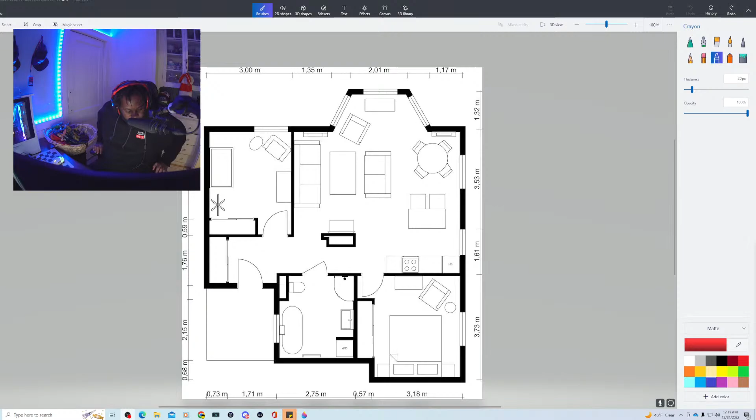So if you haven't seen it, this is part 2 of Flippers. We've been trying our best to find something and close it by the end of the year, but it doesn't look like that's going to happen. So it looks like we're going to have to go into the new year looking to find something. But that's all good because I figured out I don't have anything in place.

And for those who are just joining, let's give a little back history. Welcome to Sell the Listing. What I want to do in 2023 is accomplish my very first flip.

I've seen a lot of guys do it, but seeing somebody do it and actually doing it is a completely different ball game. It's like, why didn't he throw the ball over there? Because you're watching the game on the couch on a wide screen, seeing everything slowly develop. While you're in the game, it's moving super fast. And by the way, you're on a delay, so by the time you saw the play open up, that play's already gone. So it's very, very hard to judge something from the outside.

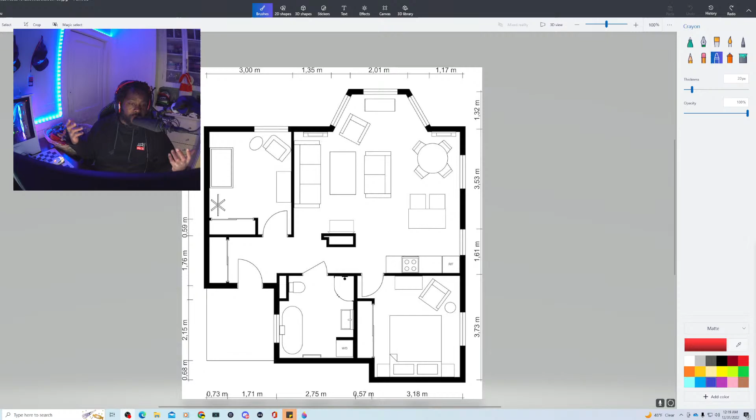So I want to do a flip. I went to my boy, VL Custom. He works down at 1010 Mass Ave, which is basically the place that handles all the permits. And I said, yo V, I want to get into flipping. The first thing he said to me was, do you have a floor plan?

Well, I do have the Matterport camera, so I can go in and scan the room and get a floor plan. But what he said was, that's called an as-is drawing, that's what the place looked like as is. So it's great for real estate, it's great for buyers, it's great for a lot of things.

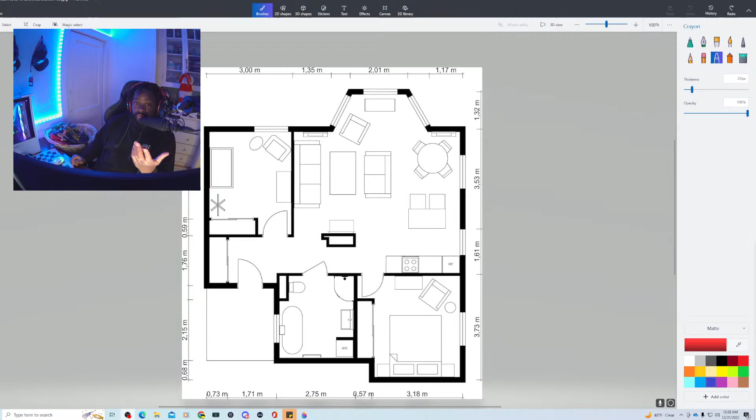But what is not great for is figuring out what work you're going to do. How are you going to alter the plan? Right, so we have a plan here, and these things here, I'm going to go in green. If you're watching us on YouTube, this will make sense. But if you're listening on the podcast, you're going to have to watch it on YouTube.

All right, so what we got here is, these things in green are your windows, right? It doesn't tell me what floor we're on, but the things in green are your windows, right?

And I know this because I took technical drawing in high school real quickly, from Mr. Walsh at Don Bosco Tech. I fucking hated technical drawing, I failed it. Basically it was like drafting, and I just fucking hid for 4 years.

So I'm about to graduate, and they come to the office and go, hey listen dude, you failed technical drawing freshman year, you're going to have to take that class over. So I had to go to summer school to graduate, and it was different. It was me, Mr. Walsh, in a room, just talking.

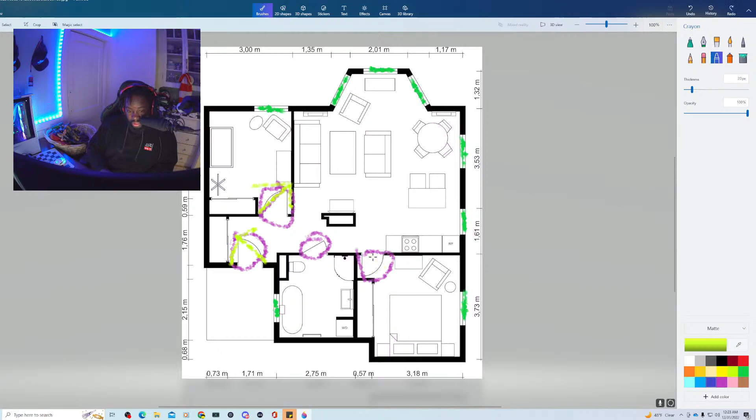So let's clean up our drawing here. Let's say this is what we're looking at. This is my bathroom here. This looks like a living room. This could be a bedroom here. That's a bedroom here. This is my kitchen, with an open concept kitchen. This is my living room here, probably with my TV, table, and all this stuff. So this is the plan, right?

But let's say this was built in 1935. So it's old as hell. And everybody now wants this open concept, right?

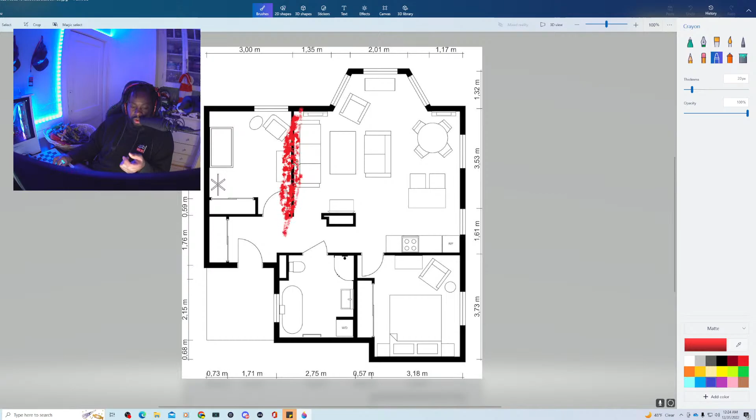So we have these walls here, right? We're thinking, I want to get rid of this wall here, and I want to get rid of this wall here, and have an open concept. So this right here could be my dining room, a big dining room, with a big table in the middle. I'm going to put a T in the middle for table. And then over here, I want my living room to be. So even when I'm cooking, I can still have conversations with people because we can see and still talk, since that wall is gone.

So when you go down to 1010 Mass Avenue, you're like, hey man, I'm going to knock this wall out here, and this wall out here, and this wall out here, and this wall out here. I just want a big open concept. But they're going to be like, where's your plans?

Are these walls weight bearing? Are these the walls that's holding up the house? So this is why I believe the first step for flipping is getting your architect. You got to get your architect in.

So when you close, right, let's say 55 Main Street. You think about buying 55 Main Street, all right? I have a Matterport camera, so I could go in and scan it real quickly, boom boom boom boom. And let's say I put in an offer, right.

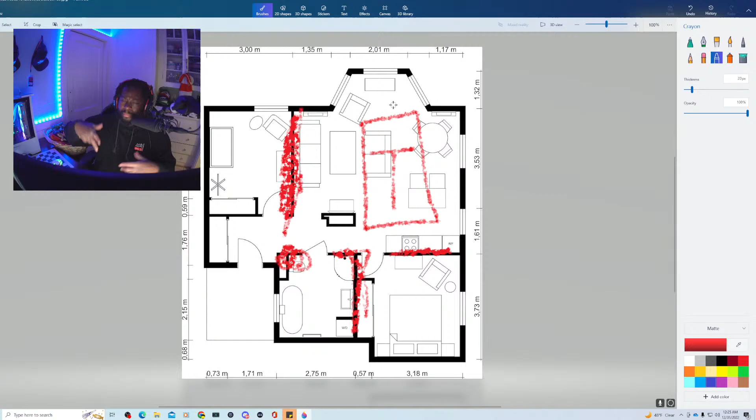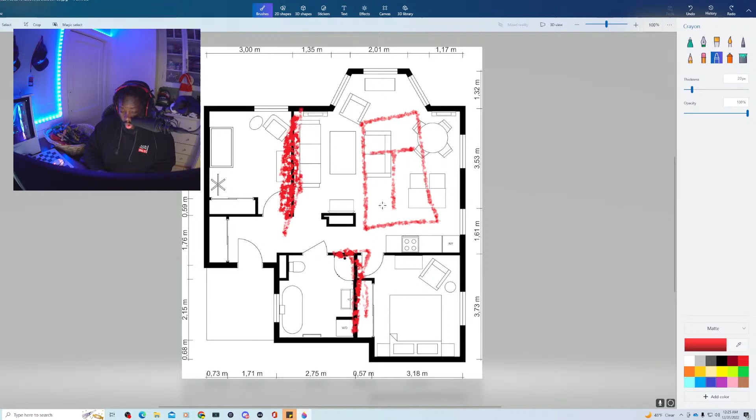And while everything is closing for 30 days, I could secretly send these plans to an architect and have the architect start to draw my plans and remove walls, or add walls. Maybe I want to add this here. Maybe I want to put like a little swimming pool in here, you know what I'm saying?

Or maybe I want to flip the floor plan. Maybe I don't want my kitchen where it is right here in this drawing. Maybe I want to put my kitchen over here, because they always say you want to put your kitchen by windows, you want windows in your kitchen. And over here I'm seeing the stove on this wall here, let me circle this in yellow. Over here on this wall, I don't see any windows here, but I see windows up here, right?

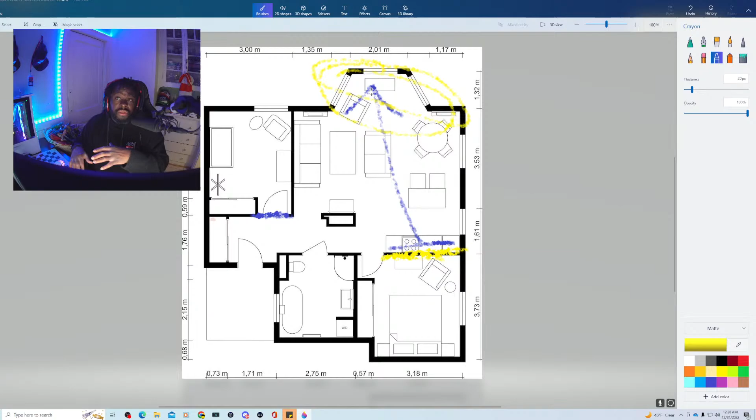So maybe I want to put my sink facing out to the backyard. I don't know what floor this is or where this floor plan is, but maybe I want to move my kitchen to here, so then I could wash dishes and peek at the neighbors, see what the hell they're doing. But when I was over here, think about the floor plan, there's no window there, it's like I'm washing dishes and staring into the wall.

So think about floor plan again. So for all these alterations that you want to do to your floor plan, you want to make sure that you put a verbal offer in, or put your offer in, and the owner says, yeah, I'll take it. You ask the owner, hey, can I go in and do a quick scan so when it's time for me to move in, I could get the renovation started? Some may say yes, some may say no.

Some may just give you a verbal, because remember, in Massachusetts, the owner could back out, but the buyer can't. It's kind of weird, I don't know. Maybe if I took the real estate exam and passed it, I would be able to answer my own question.

So let's say he or she says yes. Then boom, you go in, you do a quick scan. Now you have your floor plan here. So the next thing you need to do is hire an architect. Once you get an architect, you could give him the scan, because remember, we scanned with the Matterport. We went in, we asked the seller, hey, can I go in and scan it?

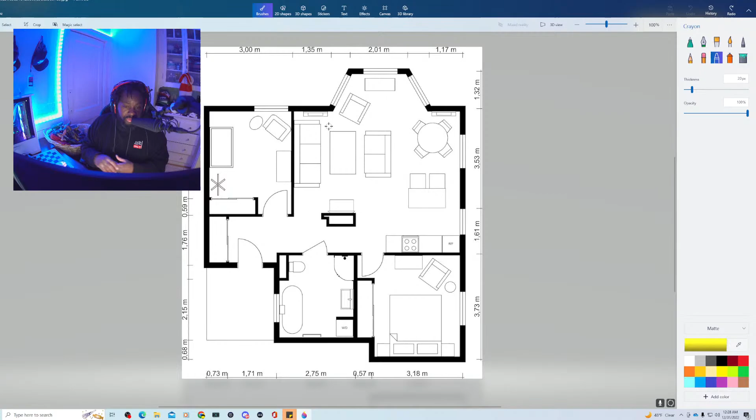So when we finally get the papers, here's my intent, here's my commitment, here's my deposit. I'm really interested in this property, I hope that you sell it to me, I would love to buy this and move in or renovate it. So when you explain that to the seller, Maybe they'll say, yeah, go and flip it out, man, I know you want to get in there and start right away so there's no dead space.

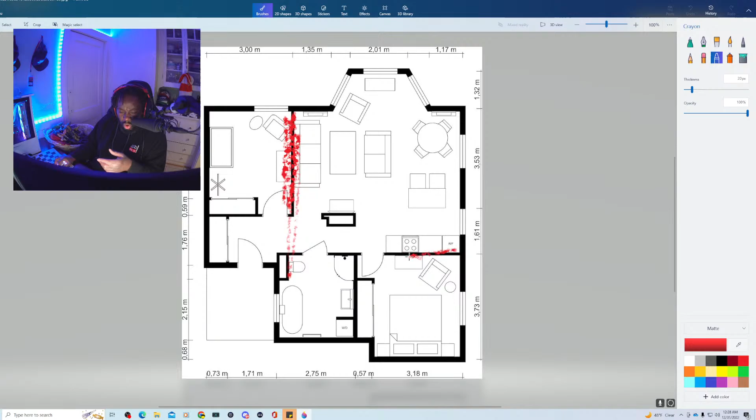So this is our floor plan here. We're going to go to our architect, we'll mark this in red and say, you know what, I want this wall gone, I want this wall gone, I want this wall gone, and I want this wall gone.

Because we're not architects or engineers, we're investors. But soon we'll start to learn these things, and we start to look at floor plans and visually be like, oh, that's weight bearing, that's not weight bearing, that's a wall that we can take out. You want to go to your architect and be like, yo, I wanted to remove these walls. No big deal, the architect will remove those walls. It's just a drawing.

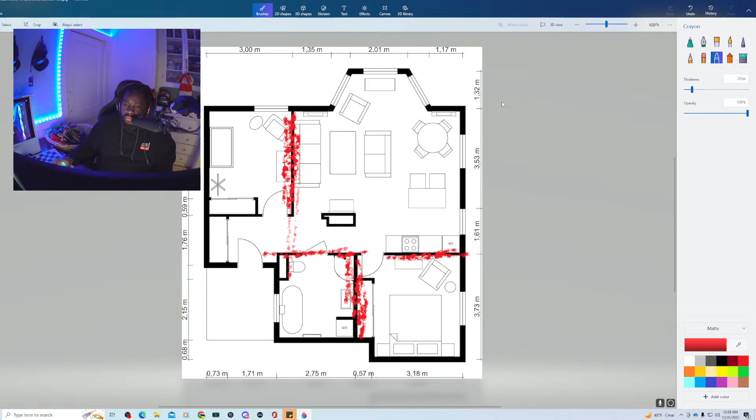But most architects will refer you to an engineer. And the engineer will look at your plans and go, my guy, you can't remove this wall, it's weight bearing. You can't move this wall, it's weight bearing. You can't tear off the side of this house and leave it open. You can't do that, the house will crumble and birds and all type of crap will fly into your house.

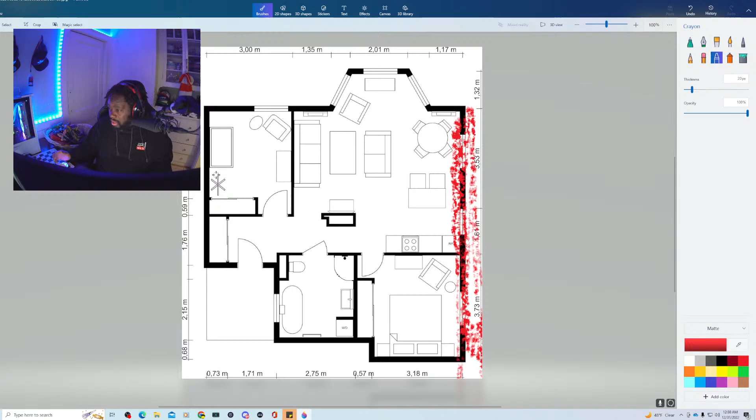You can't do that, think about floor plan here. That's fine if you want to put a window the size of this, but you got to find the right guys to install it. I want to move my plumbing over here, so now I want to move my plumbing over here, because remember, I don't like my kitchen sink over here, I'm going to move it to the windows.

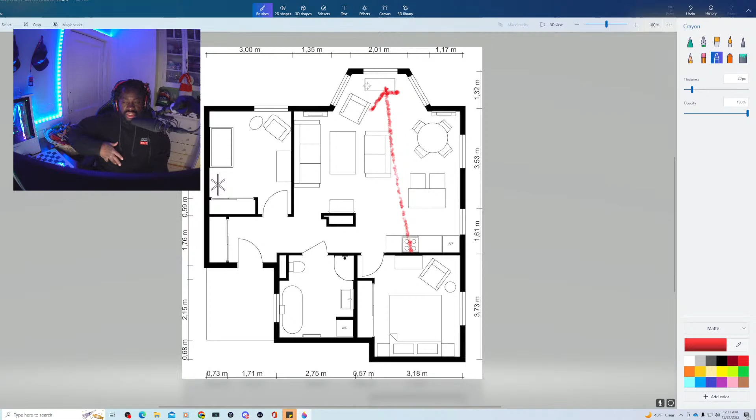So now you're going to need engineers, interior designers, plumbers, electricians. Then you can start building a BIM, and then you start doing a little 3D thing. So all this is going on in the background. You get your Matterport back, you got your architect with your new plans, you send off to the engineer. The engineer will say, yeah, absolutely, clean up our floor plan here.

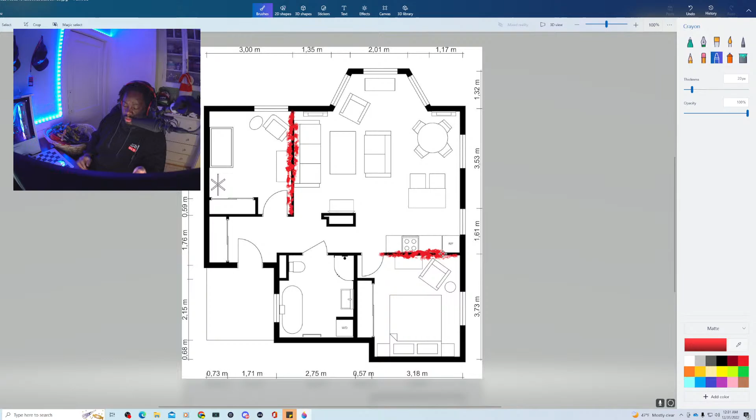Absolutely, you could remove this wall, you just got to put LVL here, that's it, and you got to put LVL here. LVL is just a big piece of wood that's stronger than a 2x4 that holds — you can put your weight on it. So you want to make sure that all of that's in place.

So the minute you get the keys, you're standing outside the unit or the listing you're buying, you've got your dumpster on wheels, and you're just waiting for the phone call from your partner: yo, I got the keys. And you throw the dumpster into the driveway, and you kick open the door because that door's not sealed, and you start the demo. That's what you want to do.

The only way you can get to that space is once you become the owner of the property, you got to go into 1010 Mass Ave and submit your plans. So now all your plans are ready to go. I heard that you could get a short term permit where you could do your demo, and then all the structural change that you want to do — that takes 30 days. So think about this.

Think about this, you close on Monday, you go to the unit and you're like, I'm going to start the demo. Fine, you start the demo, you're tearing down walls. The inspector rolls by, comes in, hey, you guys got a permit? No. You get a stop work order. That's it, can't work on your house.

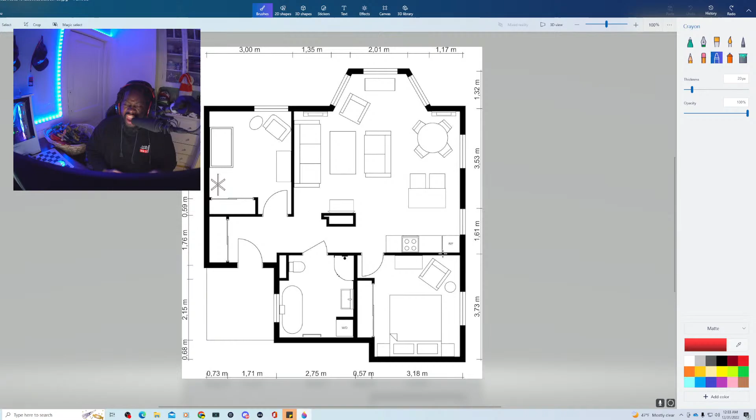If you're flipping, every single second counts. You get a stop work order, that could take weeks, days, hours, minutes — I don't know what you have to do to get it cleared up. Massachusetts is very, very strict.

So now you wanted to get out of this project in 30, 60, 90, 120 days. But now you can't because you're jammed up with the permitting people.

Or let's say you're not that type of rebel, you're an honest person. They give you the keys, you go down to 1010 Mass Ave, and you say, listen, I want to gut it, remove a couple of walls, and I need a permit for that. And they're going to say, well, where's your plans? My what? Your plans, do you have a floor plan?

And a lot of people draw their floor plans on a napkin, right? Some guys will accept it, some guys won't.

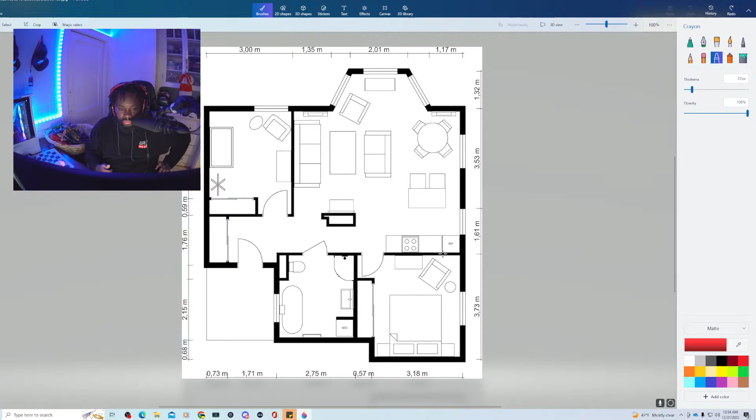So then now they don't give you the permit. Now you got to get on the phone, call architects. They got to come out, measure the room, build a floor plan.

In this market where everybody's a flipper, everybody's an investor, everybody's in real estate, shit is moving fast. Everybody's at work - contractors, architects, engineers, civil engineers, painters, photographers, brokers, real estate agents. Everybody's cranked out. Nobody's at home sitting on their hands waiting for the phone to ring.

When is somebody gonna call me? My phone hasn't rang. That's not happening, folks.

So now you rush out from 1010 Mass Ave, you go home, you go on Google. Now you got to find an architect. The architect's got to come out - he either sends a Matterport guy or he comes out and draws the space for you. I don't know how long that takes, I don't know how long it takes to draw a plan like that, but I know it's not going to take you 2 hours.

So now he's got to draw the plans, print it out or send it to you. You go to Staples, you print it. This is 2 to 3 weeks into your project.

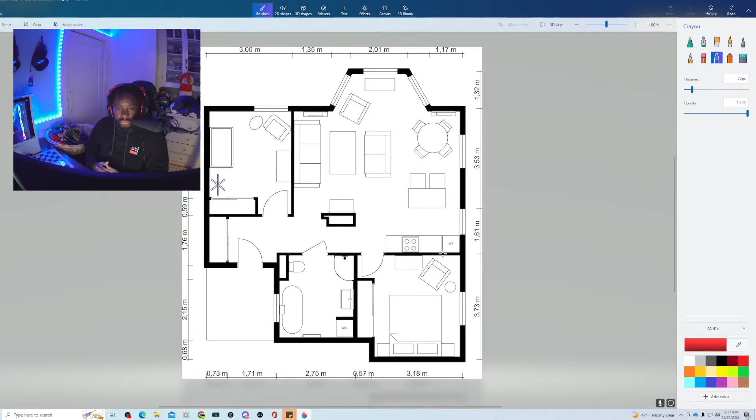Me personally, I think the architect and the engineer should be your first step. You solidify those first, put them on retainer, whatever you got to do. Hey listen man, you're an architect, I want to get into the business, please do me a favor, if I find something can you squeeze me in so I can get it moving, because I'm a beginner. You start to build relationships with people. I guarantee you the architect knows an engineer, that engineer knows a contractor, that contractor knows a plumber, because everybody's working in the same field together.

So now you got your as-is drawings from the Matterport camera that you can send to the architect. The architect can draw your plans how you want it - remove walls, add walls, move bathrooms, swap the floor plan. You know what I'm saying? Like maybe you want your living room down here, maybe you want your kitchen over here.

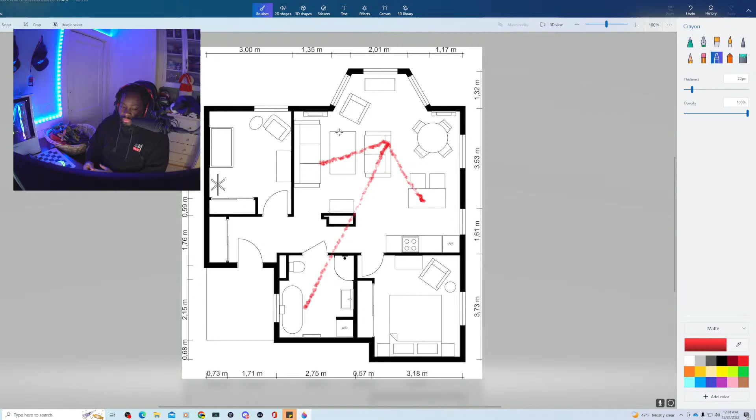Let's clear it up, I know if you're listening to the podcast you know what we're saying. Maybe this is your bathroom, and you know what, I want to put my shower in the middle of my living room. I want everybody to see my hot wife shower while we're watching football. Whatever you want to do.

Damn, son, where'd you find this? Right?

You want to make sure that all this is in line, so when you get those keys, you can run down and lay out your plan. And trust me, if you go down to 1010 Mass Ave or a permit office and you've got all your stuff laid out nice and clean, legible, big floor plans, you look professional - I guarantee you, even if there's a mistake on your paperwork, they'll rush you through. Because they're dealing with fucking boneheads for 8 hours a day, people coming in with no permit and their job should have started 3 weeks ago.

So to me, yes, you need a floor plan. Yes, you need an architect. Yes, you need an engineer. And I truly believe that if you found a good deal with a lot of equity, I guarantee you'll be able to find a hard money guy or a private investor all day long, because if you default on the loan, they could probably grab that property for next to nothing. So if you find a property with a lot of equity, I guarantee a hard money person will be really quick to work with you because the risk factor is not there.

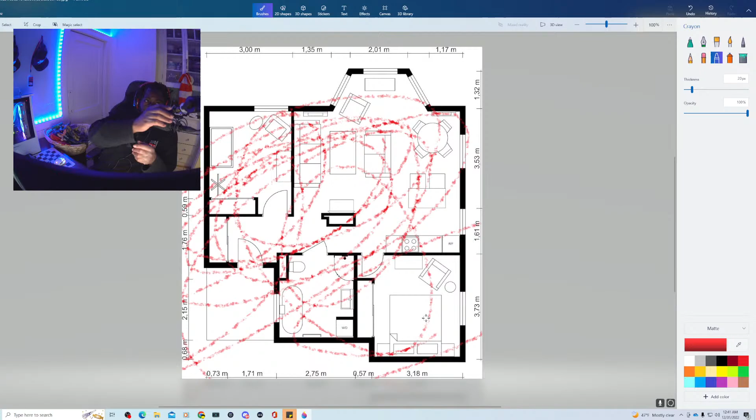This is your script here, right? As I'm coloring it in, this is your script here, people. It's like shooting a movie. Shooting a movie without a script can be really, really hard. If all the actors are on the same exact page and the whole crew's on the same page, then you don't need a script. But you got to understand, the people down at the permitting office have no clue what the hell you're talking about.

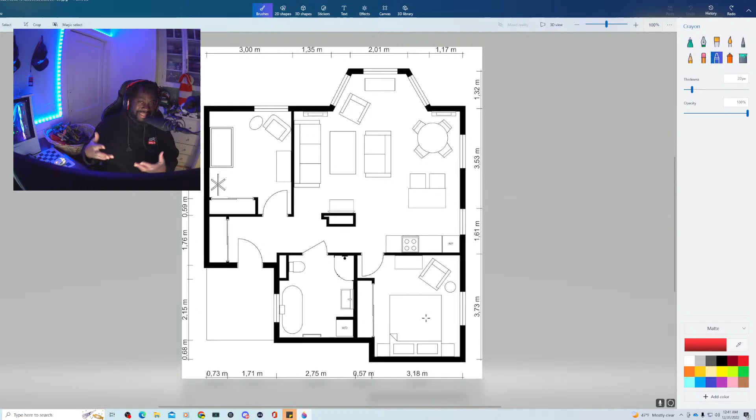There's millions of houses in Massachusetts. They don't know what your floor plan looks like, what your place looks like. They have no idea. So for them to visually see what you have going on, you got to come with your plans.

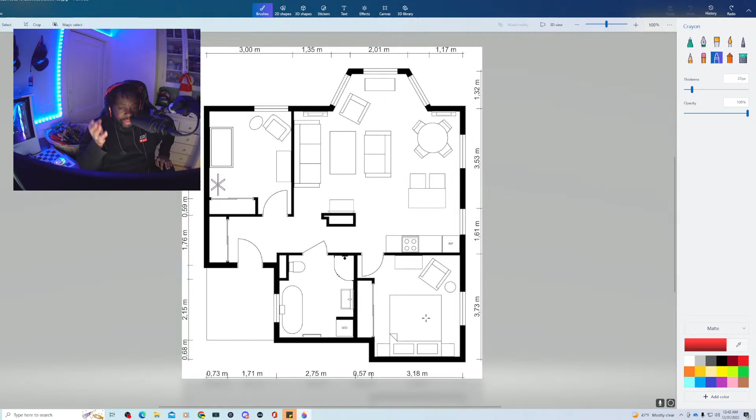And this is just what I'm learning. I'm not some expert, but this is what I'm learning. Get your plans in order first. Once you get your plans in order, then you start to see the scope of work that you need.

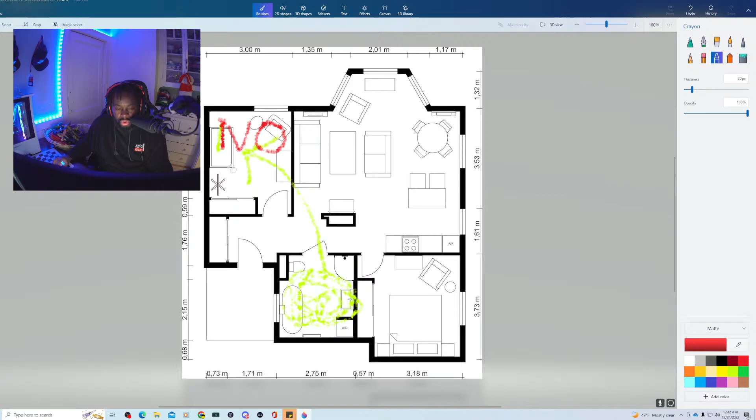We're just going to put this in green. I don't like my bathroom here, it's too small, I want to move my bathroom to this room. Right? This room doesn't have any plumbing. Pick a different color here — no P, there's no plumbing in this room. So now I got to move the plumbing from this room to that room.

Okay, that's what my drawing says, so that means now automatically I need a plumber. It just flows, right? When you have your plans and everything is visually laid out, then you know what you need to get to this point. I'm just learning this right now. I'm not an expert, but this is very important.

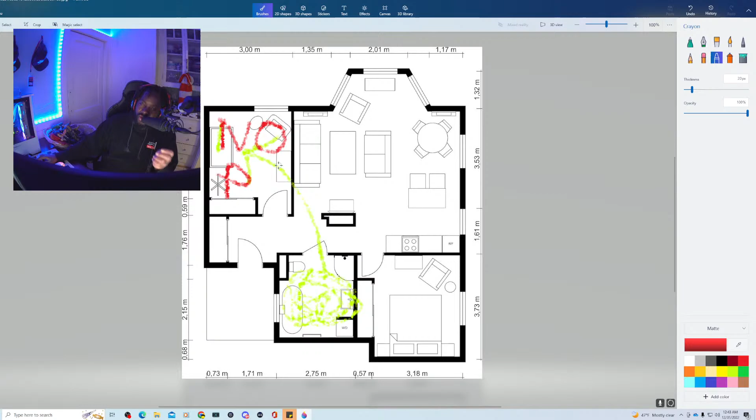As I learn more stuff, I'll do another podcast and another video blog. But the first things I need to do if I want to get into the flipping game: architect, engineer. Once I get the architect and engineer, and I find the property, I can find my hard money person — they're all over the place, not that hard. And then hopefully I could ask the architect or engineer, hey, who works with your plans? Oh, Jimmy, I do a lot of work with Jimmy. So there you go, there's your GC. Then your GC will have all your subs.

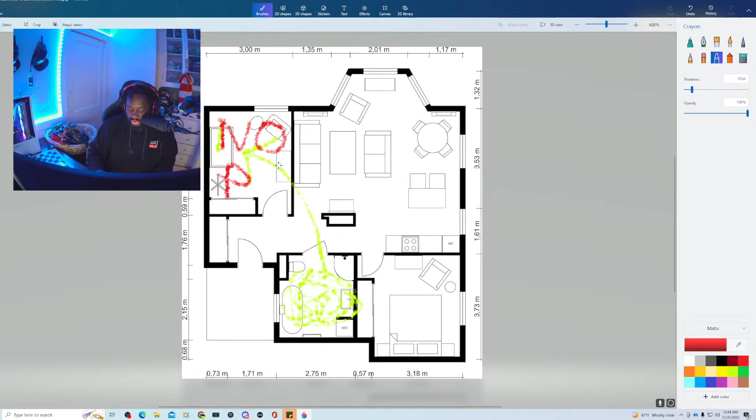But this right here, folks, we're going to draw a big smiley face in blue. This right here, folks, is where you want to start: your floor plan. All right.

It's 12:44 in the morning. Follow us on this journey. I don't know what the hell I'm doing, but this is just like my diary. I'm doing a digital media diary instead of writing it down in a book, like a lot of people do. This is like my video diary, my journal. Trying to flip a house.

I call my boy VO Customs and he says to me, you got to get your plans first. Now he's saying that because he works in that office, so he sees it as priority. Where other real estate agencies are like, man, I'll pull a permit, and by the time I get the permit back, blah blah blah. And we do — our team's so good that we do everything up to code anyway. But you're not on that level yet. I'm not on that level yet. I'm just beginning, but first things first, I want to get my plan.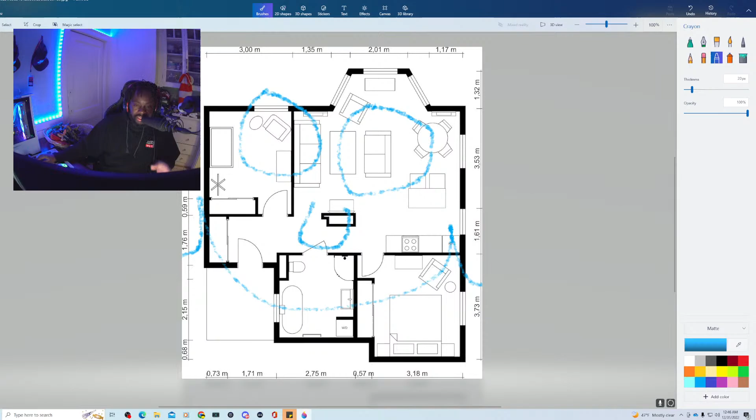All right, that's it, it's 12:40... it's 12:45, and we're trying our best to find a flip. We're trying our best, just follow the journey with us. It's going to be fucking cool, man. It's going to be from beginning to end, all the shit that's going on. All right man, have a good night.